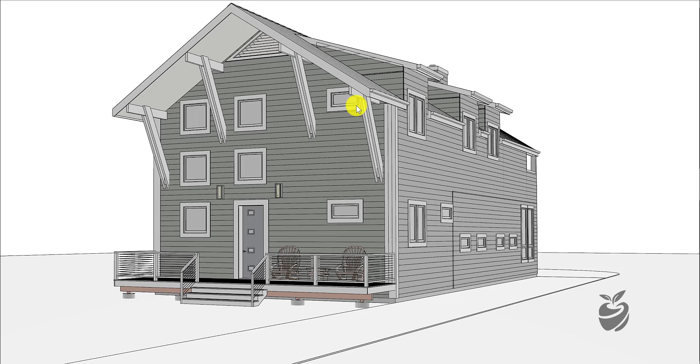One of the owners asked to make sure we could have a two-story space when we enter, so we're granting that with a stairwell that goes up. The ceiling will come from 6 feet and then come up, stopping at 10. So we have 10 feet floor to floor on both floors, and the style is sort of craftsman-y, with the required structure to hold the roof, the 8-foot roof extension.

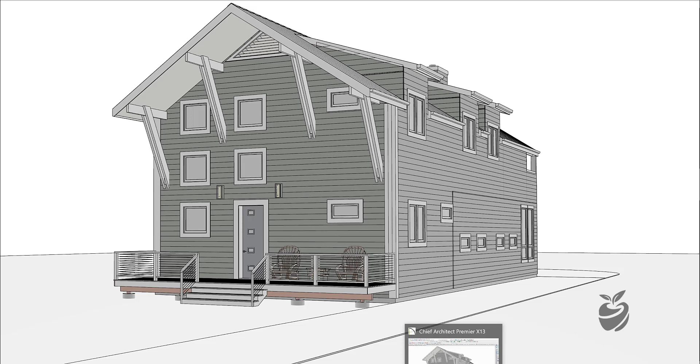Up above we will be venting the attic, and it'll have an incredible amount of insulation piled up to about here for about an R90, and then we're going to vent all that. We'll use a stainless steel cable system, so sort of a contemporary craftsman look.

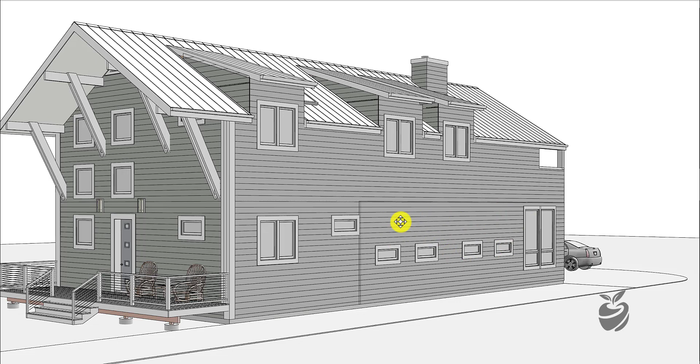As we start to go around the house, the bedrooms are upstairs. We have escape windows, and we have an office with window lining up there. We have a bathroom window on that level, and here we have countertop level windows with cabinets above in the kitchen area and an entertainment room area.

And then we have a sunroom, as this faces west. Going around to the back, we have an incredible amount of nice sun. We also will have a chimney with a fireplace that comes up.

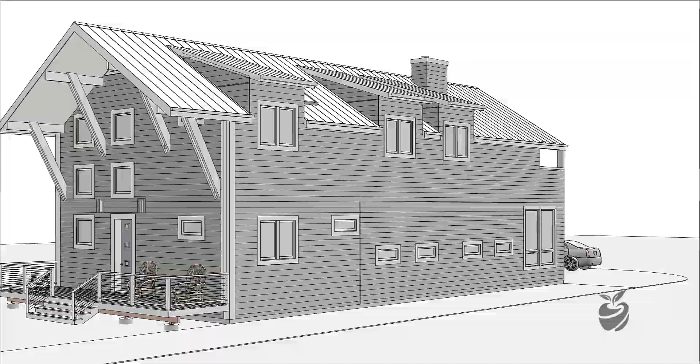Around to the back side, the sunroom is 13 feet wide on the interior, similar to another room that was shown, so the furniture placement can be the same. This one will have all the operable windows down below, fixed units up above. These go from 9 feet to 1 foot off the floor, so an extensive amount of glass south and west.

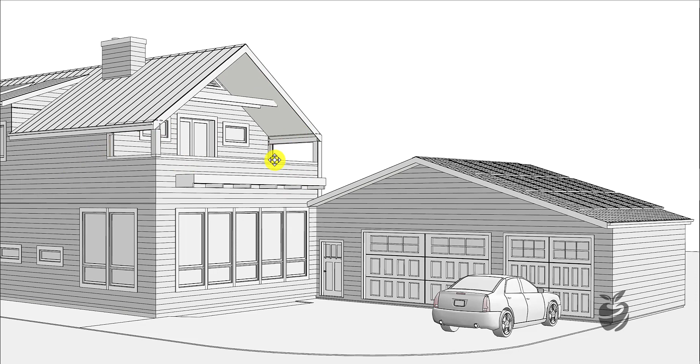We will provide a protective overhang that will allow the south sun to penetrate in the winter and shade in the summer, so it doesn't overheat. Up above, on the back side of the master bedroom balcony, we have cross ties and beams to support the roof extension across the balcony.

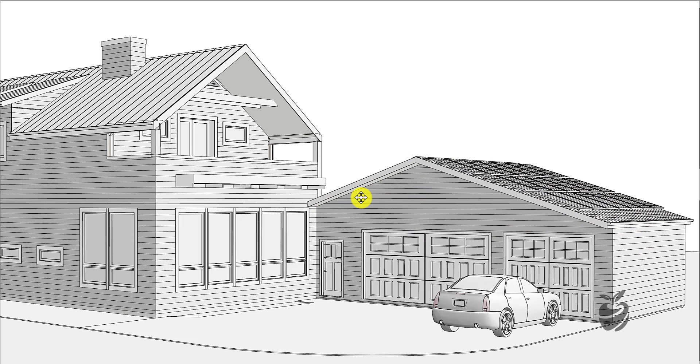Facing south, the roof over the garage goes east-west, so in this direction, this faces south. The ridge goes east-west, this faces south, so we can have a solar array on this portion of the roof. We create an overhang here because we're going to need a little bit more roof area to have the panels we need for enough power for the house.

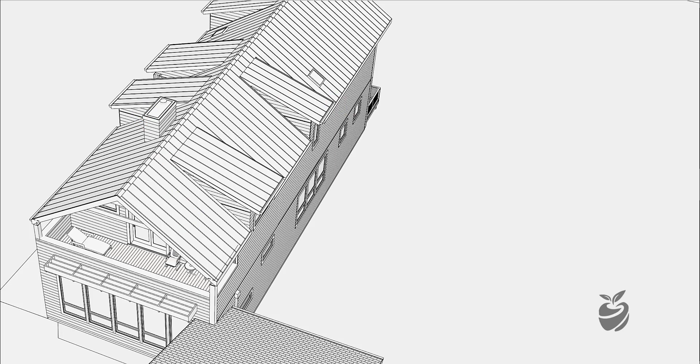Here we can see a little peek of the balcony space above, the sunshade device, and the dormers that spring from 6 feet and very quickly go to 10 feet. Skylights at the bathrooms here and here. Laundry room.

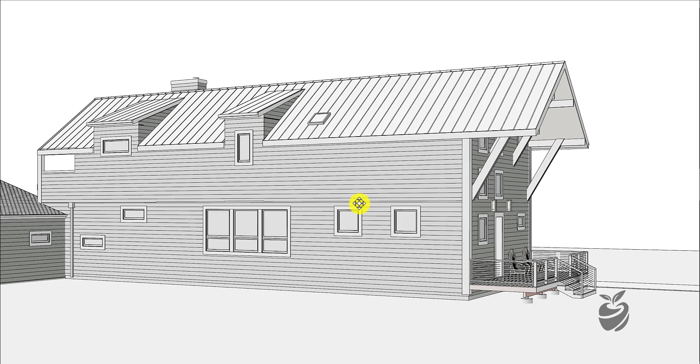On the side facing east, we have large windows in the dining room that spring from 3 feet, with operable windows on the bottom. These are part of the stair, which is 2 stories in the foyer area here. This stair goes down to a new basement addition. A little window in the mudroom.

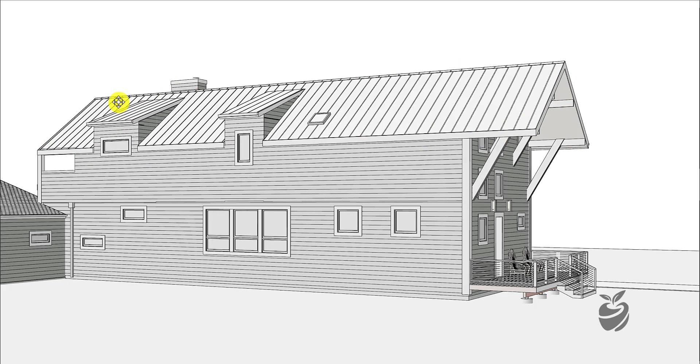If the budget will allow, we will go for a metal roof. If not, we will go for a shingle. That is on the garage.

A peek of the floor plan of the basement. See where we have now created an existing crawl space. We will add a basement that will be about 9 foot clear to the floor, and then a 3-car garage.

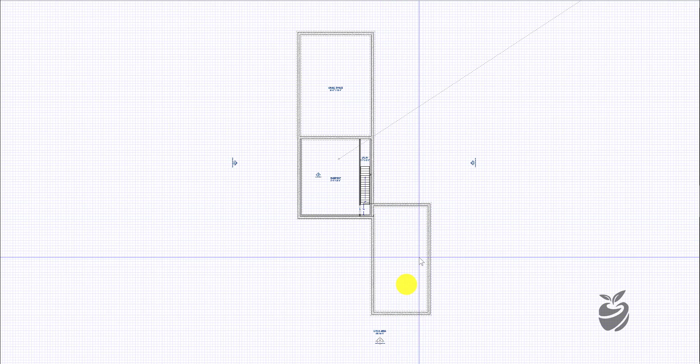Okay, let's take a peek inside. You can see the 2-story foyer as it comes up, and we have the same contemporary railing detail there, windows that rise up. Since we have a 10-foot ceiling, we don't have to have a 10-foot closet. We stop the closet at 8 feet and continue that ceiling detailing all the way across. These are 3-foot centers, and that creates that nice feeling that this is a large loft sort of space.

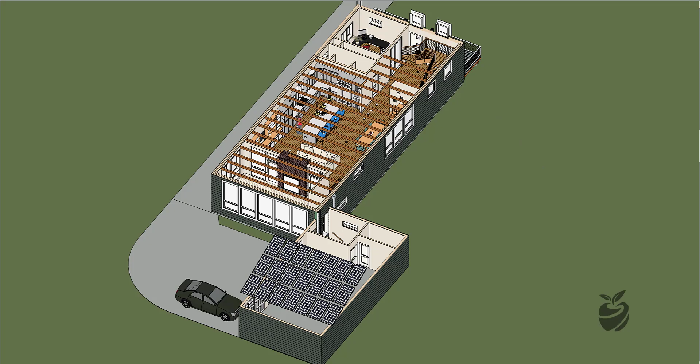8-foot glass doors into the office area. So we have the office area. This can also be used as a bedroom sometime in the future, so we have a closet built in. Maybe we take the doors off and this becomes shelving space until it becomes a bedroom.

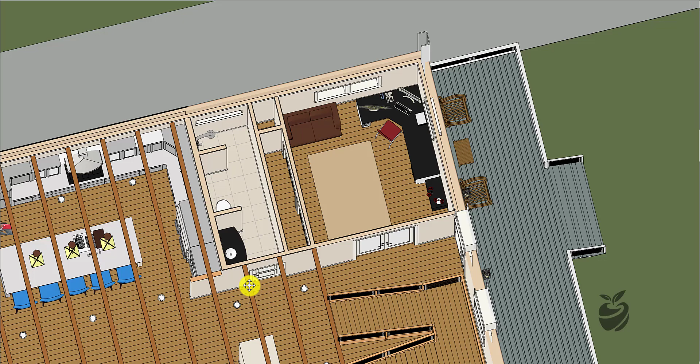The powder room has a very nice sink, about 4 feet across, very generous. We hide the toilet so no one can really see it with the door open coming by. And then we have a roll-in shower, so the wheelchair doesn't have to trip over a bump to get into the shower space.

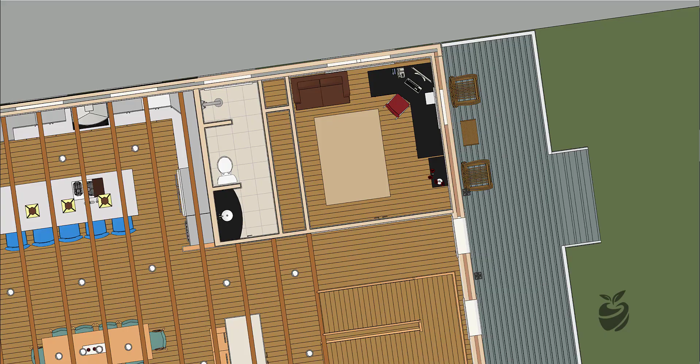As we move into the kitchen area, we have oven, microwave, 4 feet of refrigeration, countertop, cooktop, induction because it is a net zero home, so we don't want gas combustion occurring.

Glass cabinets on each side, very similar to another home that the clients liked, I believe the parents' home. Again, a large 12-foot island, very similar to the setup in their parents' kitchen, which they like.

And then we continue with some possible built-ins on this wall for the family area. Put the TV here. If we need to make it bigger, we can make these a little smaller, have a wider screen, maybe even with a tilt-out arm, so that people sitting here can watch the TV, if TV is a large priority.

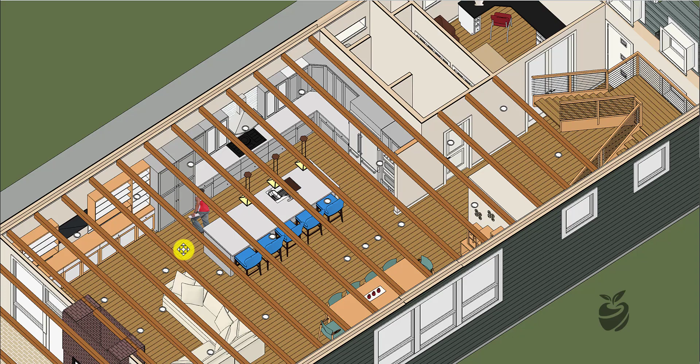2 large pantry cabinets, which is plenty for a young family.

A very nice dining area can be developed with a long table, and again it faces the window. There's a nice tree in the 20-foot side yard that we'll have a wonderful view of. We place the windows up at 3 feet in case we want to put some furniture below the windows here, adjacent to the dining room. Something like this can easily fit below there.

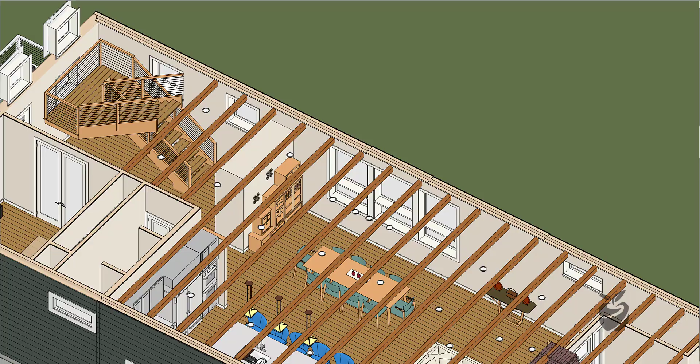Some light highlight to light the stair going down to the basement. Maybe this is the area for the china cabinet. Here you see the stairs going down to the basement. We have the same railing detail, lower window that follows the stair to light up that stairwell.

And here we have the main feature of the house, which would be a masonry veneer fireplace with gas log burners, glass. We will seal it off on both sides. It's see-through so that we don't lose heat in this passive home. We can't really afford to have air coming in and going out the chimney with all our energy. We're really trying to minimize the heat loss.

So getting very, very tight construction is very important. We will be using Aeroseal to seal every opening so that we have no air infiltration loss. And beyond the fireplace then is the sunroom.

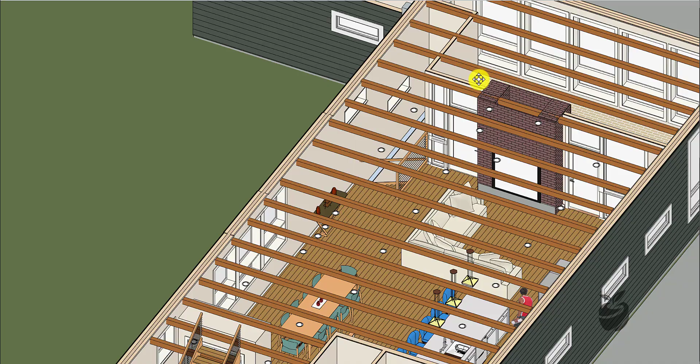The sunroom features a tile floor because we want to pick up passive solar heat when all the sun penetrates through the glass. It then can heat up the tile, and the tile can then absorb it as it slowly irradiates it back into the house.

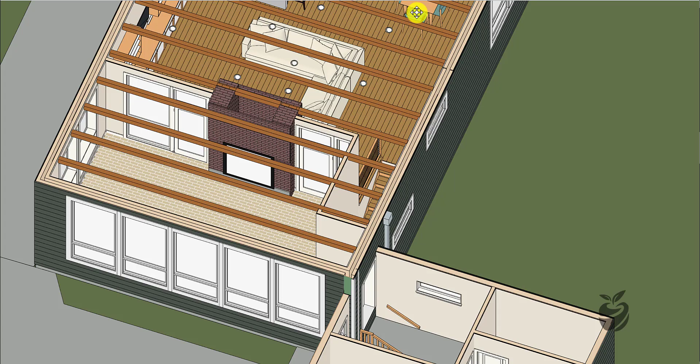And we can control the heat by opening the windows if it gets too hot, and we let it into the house with the doors will open, and perhaps also a fan which will take this heated air and circulate into the house. I'll probably use a Zehnder system to make sure we always have circulation of nice air into the house.

And we door to the mudroom. Here we're going to develop a cubby area so that the kids can put their laptops and backpacks there when they come in through the mudroom. And the people from the garage, going through this door and into the mud area, hang up their coats, boots, and then enter the house and go up.

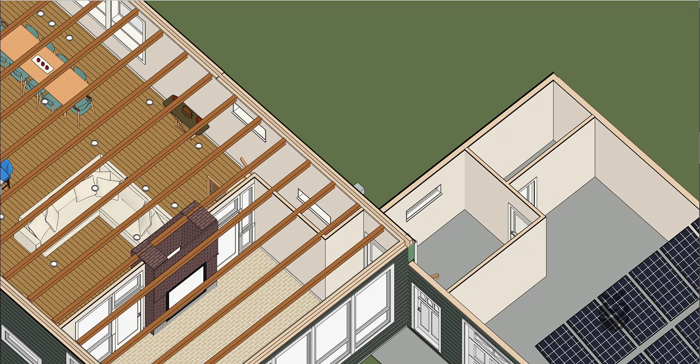Here we're going to have the electrical room, as we'll take the solar stuff, feed it down into the electrical, into the inverter, and we'll have the battery storage in here, in this room as well.

Okay, the master bedroom balcony area overlooks the wonderful yard. I thought it would be nice to just keep it nice and private with the 42-inch, actually 36-inch, half wall. And you can sit down, read your book, and even in a light rain we have the covered roof. So it's a very private balcony area with a 5-foot door.

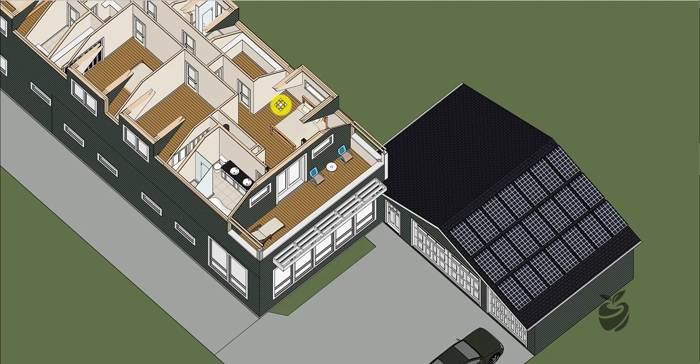That leads you out, and windows into the bathroom, a window into the bedroom, a window above the bed, plenty of room for a dresser on each wall, and a night table.

Let's take a peek at the bathroom a little closer. When you enter the bathroom, you'll have a tub and a nice shower. So that's your view. This is at 6 feet, and then it very quickly, no, this is at 10 feet. 10 feet. The dormers are over here.

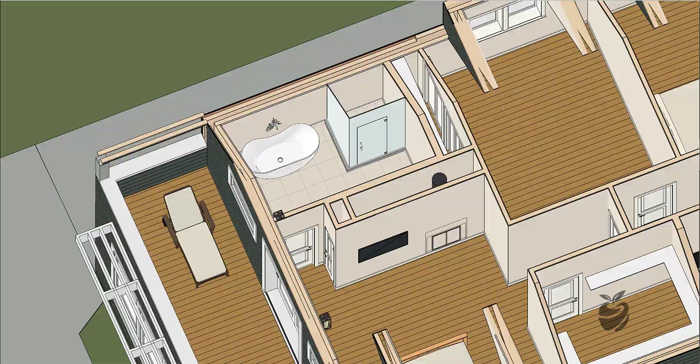We have a his and her vanity, mirror area, and a toilet for a very nice master bath. In the bedroom area, right across from the bed, we can perhaps place a big screen TV.

We do have the flues coming up from downstairs, which will be in this area. If we want to, we can have a second fireplace, or no fireplace and just put some bookshelves in here to save a little bit of money. So we do have the option of putting a second firebox upstairs.

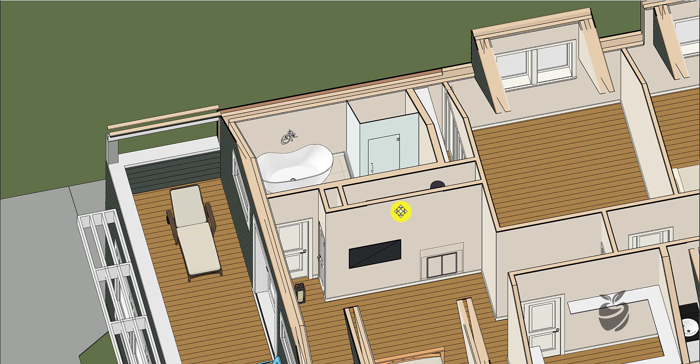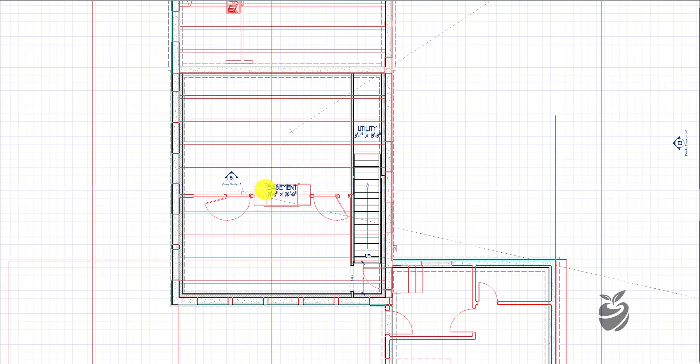So I think we want to have a nice clear space for the kids to play, so they have this large 30-foot room. So we'll just put double trusses across the span, and then we can use a lightweight concrete firebox for the first floor.

And here we see in red is the layer downstairs, and we have the firebox, and the flue would come up. In this area, we have the option of placing a prefab over here.

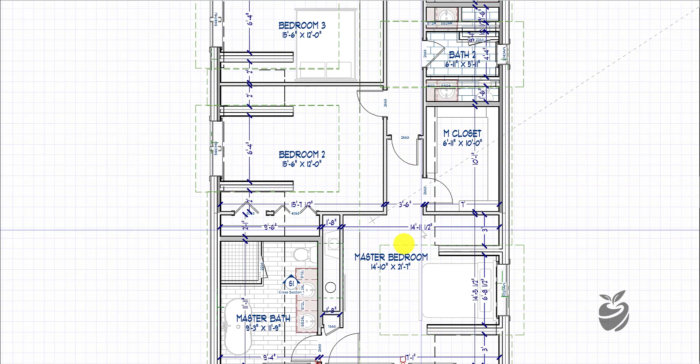We have a large walk-in closet, 7 by 10. Entrance from the hall is there. We have a door there, so we keep the wall space for dressing on this side and this side, with the high window there.

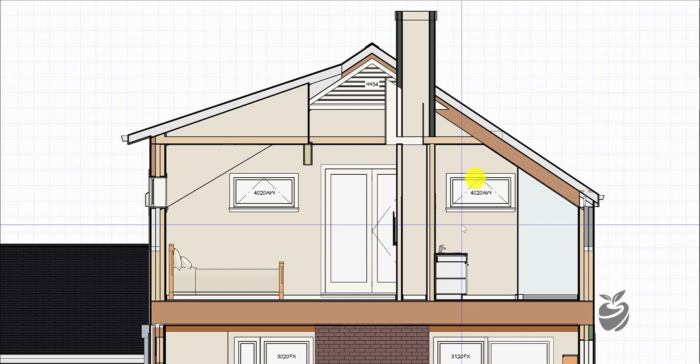Over here, same with the shower, 6 feet on that side. You're at 8 feet, you're 9 feet, 8 foot. That's about 9 foot when you enter the shower in the bathroom.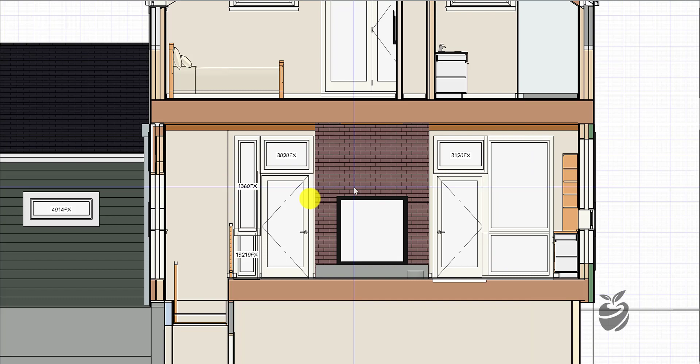Okay, kids' bedrooms are very generously sized. Closets, his and hers, matching closets. Again, the dormer that gets you to the 10-foot ceiling. Bathroom with a dormer that gets you to the 10-foot ceiling.

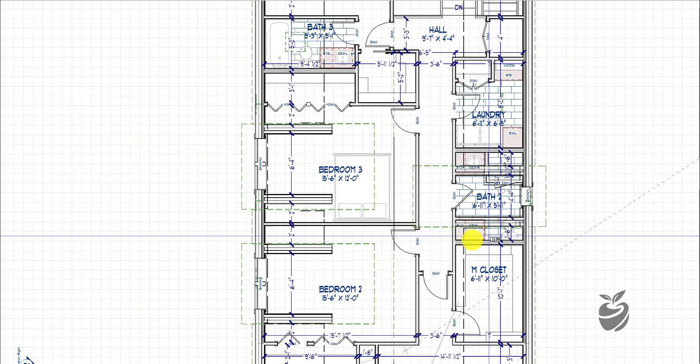His and hers, sort of Jack and Jill-ish. We really can't connect to Jack and Jill. I always think the Jack and Jills are actually a lot of waste of circulation space because they take up a lot of room to get in on two sides. And here, very compact use of space. Shower, toilet, in a nice sized room.

You come up the 2-story stair space. You're in the 4th bedroom, which is a private bedroom with its own bath, skylight for light, and a laundry area, also with a skylight for light. Washer, dryer, folding area, cabinets, and a very large linen closet for towels, sheets, etc.

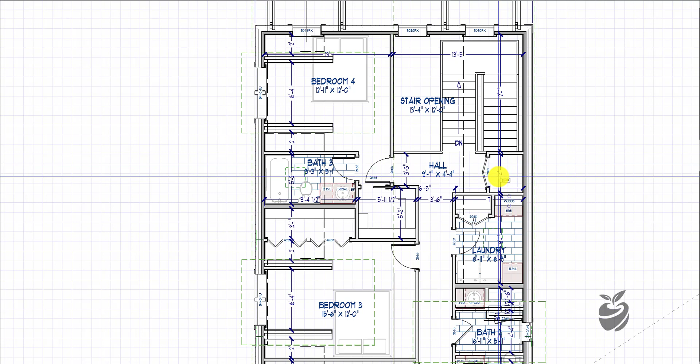And also, nice, generous closets for this bedroom as well. And this is a possible utility area, depending on work with the consultants, how we're going to take care of the heating on the 2nd floor or come up from the basement. So that's something that needs to be discussed.

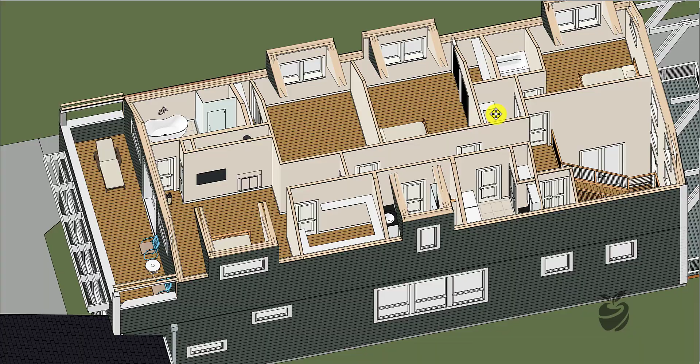Okay, from this perspective, you can see the stair up to the hallway, 4th bedroom, utility space, laundry area, shared bathroom, large his and hers closet for the master bedroom. Very nice balcony overlooking the beautiful backyard. Nice master bedroom, the two matching bedrooms.

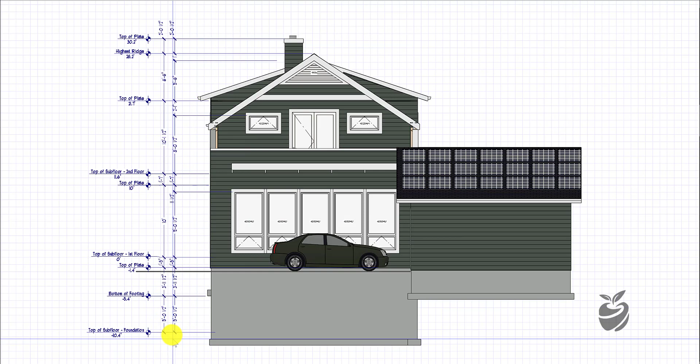This elevation view, you can see the solar array on the garage roof. Cross tie there for the balcony, which occurs at 10 feet. And the large 9-foot, almost floor-to-ceiling windows in the sunroom, the shade device, and the ridge, 28.2 from 0, but we have to, it's actually measured from grade, so we are about 2 inches off of the 30-foot from the grade line to make sure we're in compliance with the height restriction.

There you have it, a beautiful net zero house in suburban Chicagoland.